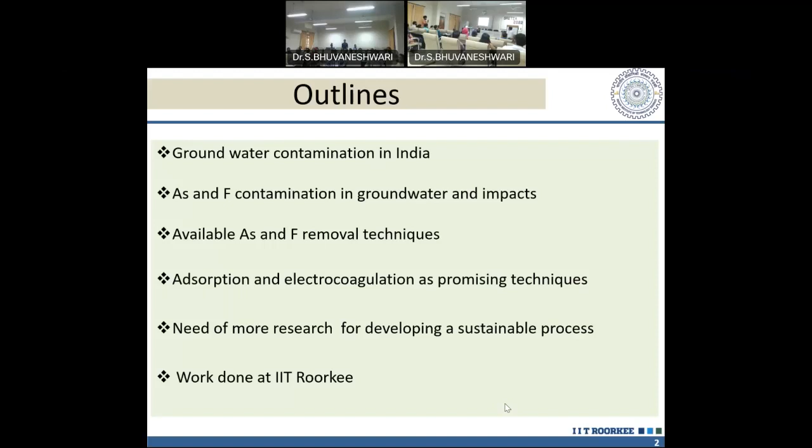So what is the groundwater contamination in India? If you see the Department of Science and Technology, Government of India site, you can search and you will see there are more than 250, 260 sites - water challenged sites in the country where either arsenic, fluoride, nitrate, cyanide, heavy metals are present in the water, or personal care chemicals, seawater intrusion, and salinity are there. These are the major challenge sites, and water is being affected.

So we got an opportunity to work on this area under the Indo-France water network project. We found that arsenic and fluoride are both available in the Rajnandgaon district of Chhattisgarh, and TDS is also a major problem in our area, would be there in Gujarat. So this can be the major problem of many other places not just reported. TDS is a major issue.

So we need to develop technology for this purpose, and we are focused here to do something for arsenic and fluoride contamination, and also personal care chemicals etc - the next class will discuss grey water treatment. That way we are targeting one by one as per our capacity: development of adsorption-based low cost systems for treating arsenic and fluoride contaminated groundwater, and development of electrocoagulation-based low cost systems for the same. These two areas we have identified as per our capacity and background.

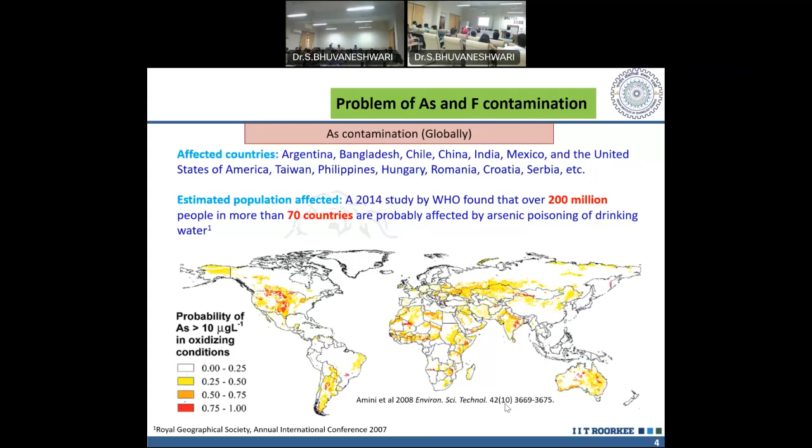In India, this is the full map, but arsenic contamination is mostly in West Bengal and Bangladesh, and other parts along the Gangetic belt. Mostly the Gangetic belt has the arsenic contamination, apart from some areas; it's not widely spread across the country. Some other areas also.

This is basically supposed to be due to the presence of stagnant flow water in the Ganga, and due to flood situations or other geological reasons, this is affected. But in other places where we are working, like Chhattisgarh, the reason is supposed to be different - maybe from industrial effluent, because there are mines, so mine drainage will be responsible. Whatever the reason, ultimately the groundwater is contaminated, and this is the statistic you see.

So it's a 2017 report - 239 million people, more than 21 states are probably affected by arsenic in drinking water.

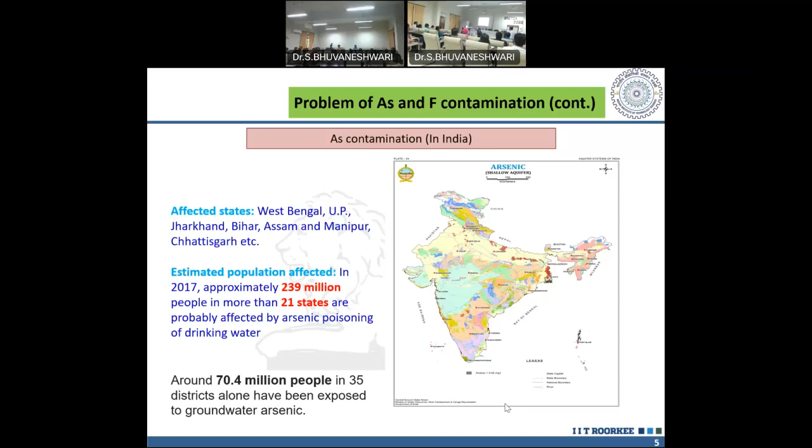And this is our Indian context again. As I told you, Rajasthan, Punjab, Haryana, Gujarat, Maharashtra, Chhattisgarh, then Bengal, Bihar, and also Assam are largely affected by this fluoride contamination. Estimates say the estimated population affected in 2017 is 11.5 million, and more than 19 states are probably affected by excessive fluoride. So these are the data.

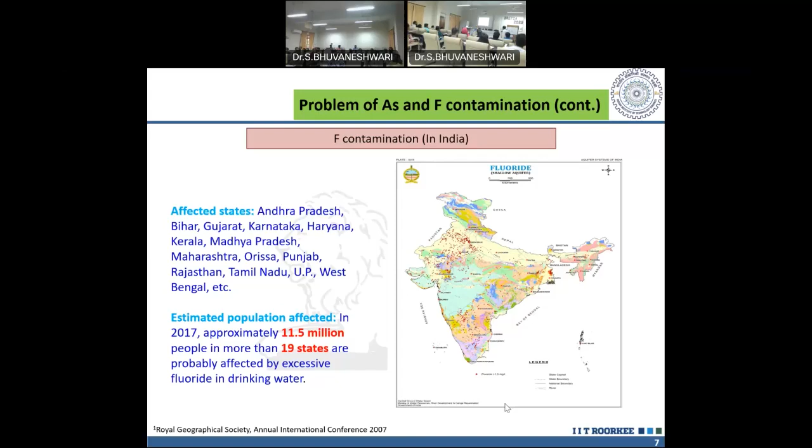Then you see both arsenic and fluoride are both available in the water - in Assam, Bihar, Chhattisgarh, Karnataka, Haryana, Jharkhand, Punjab region. We have identified some regions like this one - this is Chhattisgarh.

And the effects you know very well - because of arsenic content, cancer, arsenic-related cancers. And fluoride also gives different types of maladies. There is a problem of fluorosis, including skeletal fluorosis. So these are the negative impacts of arsenic and fluoride - these are very advanced impacts we can say.

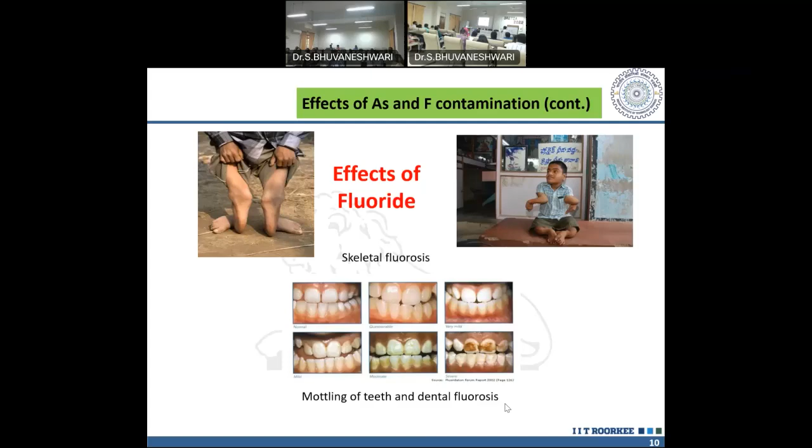Please go ahead. Give some time. Okay, now.

So what we have seen now is that arsenic and fluoride are available across the globe and in India mostly, so we need some treatment. As I mentioned, our people are not responding well to control by conventional methods.

Now, what can be the most suitable technique for us? For that we need to review all the available techniques - what are the positive points, what are the negative points, what is the scope of improvement. That we have to identify, so that is what we are going to do now.

The different techniques are precipitation and coagulation as one technique, another is membrane-based process, ion exchange and adsorption. These methods are recommended by EPA for arsenic removal - these are best available techniques. This is tutorial work, we do not need to repeat it. Now we have to compare which one has potential to remove arsenic and fluoride from the initial level available in India - that is the first part. And second part, where is the scope for further reduction?

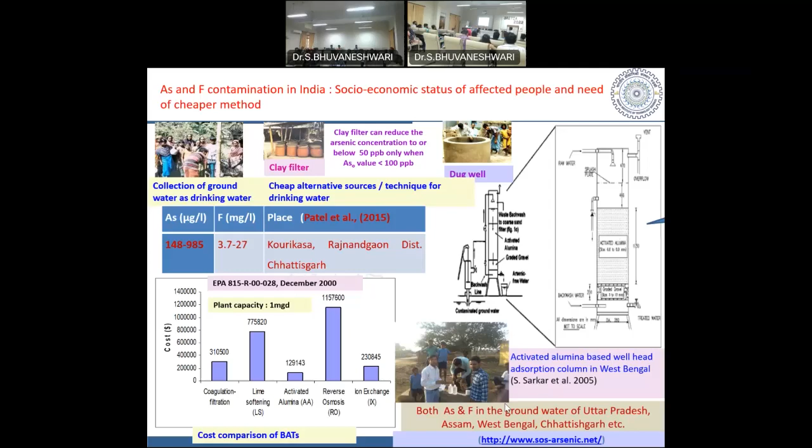Then you see that people have also tried. Prior to our effort, we will try to use this method, adsorption and coagulation method, as done differently by DPHE Bangladesh, public health engineering Bangladesh, and B.E. College.

B.E. College Howrah, so they have also developed some technology. Then there is Pal Trockner technology, and West Bengal public health department, they have also developed technology. Then RPM Marketing Private Limited, and engineers, they have developed technology. Jadavpur University also has developed technology for this, all for arsenic removal.

So all these removal technologies are based either on adsorption or coagulation, because these are the cheaper options we have already mentioned. Okay, then these are some salient features.

So what is this? Coagulation, sedimentation and filtration - this is the Bangladesh technology. This is the photograph showing how they coagulate and then separate. And here also you see an adsorption column fitted with tube well, adsorption on activated alumina, with capacity of 1.41 gram per kg, which is not very high.

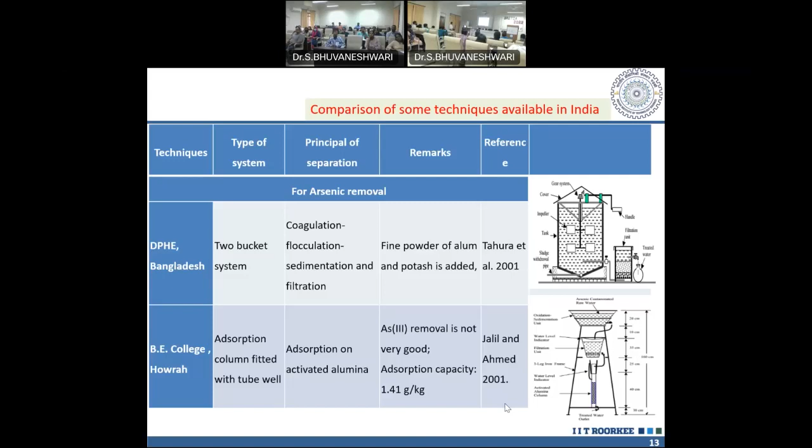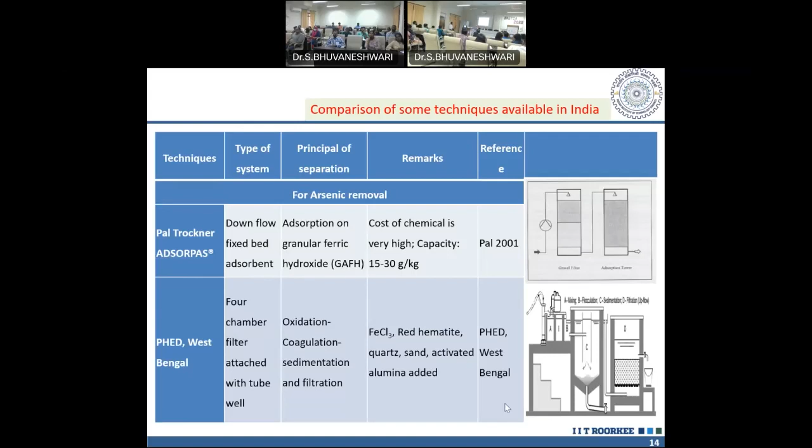Although there are some limitations, price is high, 2 rupees 31 paise per liter, for this two-chamber unit. The enhanced hybrid activated alumina adsorption they have used, with a fixed bed adsorber of ferric hydroxide.

Now we are coming to see the available technology for fluoride removal. The first one is the Nalgonda technique, developed by... this is based on coagulation and sedimentation.

Another is the Prasanthi technique, using activated alumina based, with AlCl3, alkali, aluminum salt, lime, and bleaching powder. There is a chance of overdose, so it has some limitations. Sulfate concentration in treated water is greater than 400 ppm, and aluminum concentration is greater than 0.2 ppm. These are some negative impacts and limitations, but the Prasanthi technique is still workable.

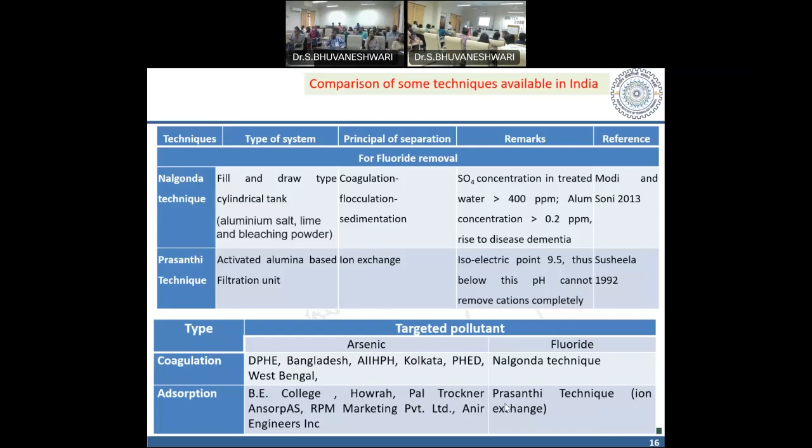What are the drawbacks? You see here, this 2017 report from the International Journal of Environmental Research and Public Health. If we see, 475 out of 570 Arsenic Removal Plants were not really useful, with 145 not even in working condition. Removal of arsenic by 264 ARPs showed arsenic reduction from 185-165 microgram per liter to 44-87 microgram per liter, which is above the permissible limit, not below it.

These are the limitations. 28% of these stations could not meet the guideline of 50 microgram per liter at that time; now it is 10 microgram per liter. So you see all the techniques being used are not that effective.

This was the driving force behind our effort to do something. So then we decided to develop new adsorbents and replace coagulation by electrocoagulation. If you can replace coagulation with electrocoagulation, we get two advantages. One is we do not need to add additional chemicals.

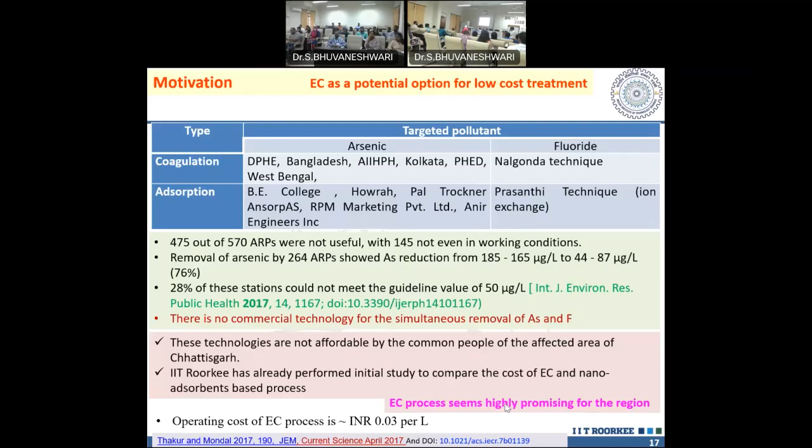Again, there was some confusion about whether we should put in the effort or not. Is there any success on this process? Because electrocoagulation is not a new concept, but its application at a wider scale is relatively new - handling a large volume of water, it is not that well established.

So we searched and tried to find out if there is any example. We found the Gadgil Lab, USA, at Berkeley, California - they have developed this and are implementing it in our country, in West Bengal. So American people are thinking about our solution and they are coming and setting up the plant for us.

Okay, you see, so this ECAR, electrochemical arsenic remediation, this method. What is happening?

Electrodes, cathode and anode, the electrode is iron based, so iron hydroxide is produced. Iron hydroxide helps oxidize arsenic 3 to arsenic 5, and arsenic 5 is settled down. That is the mechanism, so that way they are able to produce treated water.

This is estimated at 0.03 USD per person per day. So what is the cost now? Can you calculate? 0.03 USD per person per day, 0.03 is 20 how much? One person, how much can it be?

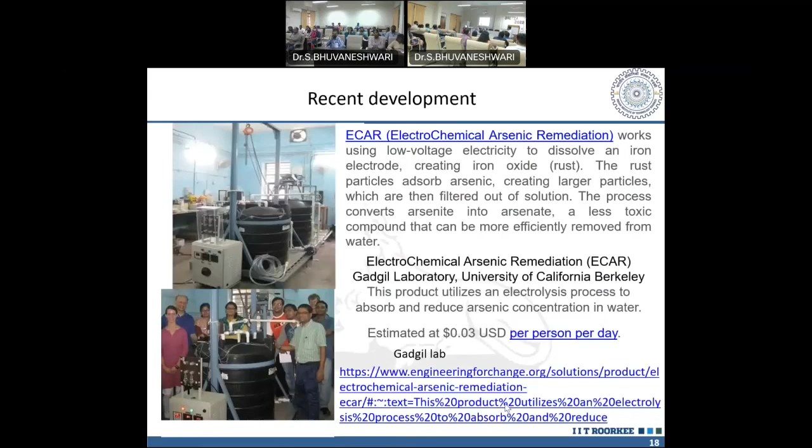Here another mechanism is used. In this case, this is Germany, the German people are working, and their plant is running in Haridwar, near our institute. The German people are working, they are installing a plant in our institute. So you see here, what is the mechanism?

Here, electrocoagulation means dissolution of the electrode is not taking place. The mechanism present is that electrons are released, then chloride and electron react with water, producing O2 and so on, and the chloride present in the water is converted to chlorine.

That chlorine reacts with H2O and gives HOCl. This HOCl helps the reactions: Fe2+ plus HOCl react, giving FeOOH plus Cl minus plus H plus. This H3AsO3 reacts with HOCl, and then forms H2AsO4 minus. This is the mechanism for removal.

So no, dissolution of the electrode is not necessary here. There will be some reaction and then separation, filtration unit. So we see that the filter has a depth of 66 centimeters and a diameter of 17.7 centimeters, accounting for a media volume of 16.3 liters. So this is their technology.

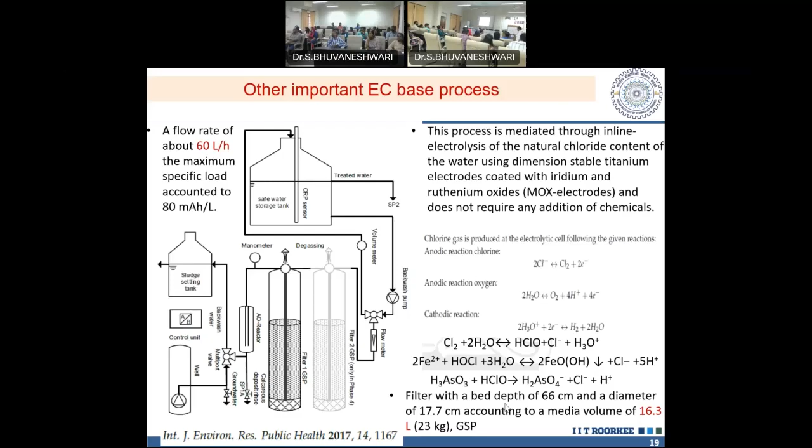Well, in our system we don't have other compounds, no, the organic purity is nil, there is no organic content in the water. So how would the organic reaction occur? Okay, that will not work then. Okay, then you see some other case. Any more questions?

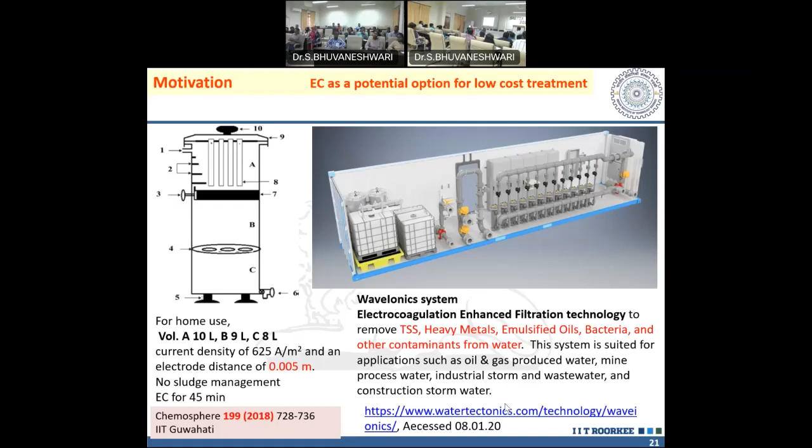This is the report of some EC-based technology used for wastewater treatment as per the literature. That's some inspiring material. So what we gather from this is that electrocoagulation has potential. This method has potential to be used in the treatment of contaminated groundwater to remove arsenic and fluoride.

Can you conclude from the discussion we have made? We can do that, but we have to modify and develop our own system for our own application, because we have never seen any system describing the working with wastewater having the concentration of arsenic and fluoride present in our country in the same way. We have not seen any example, so we have to do that now.

And spent adsorbent management and EC sludge management is an important issue. We have not seen any such report, because I am taking arsenic and fluoride from water to solid. Then what do we do with that solid? That is a great question.

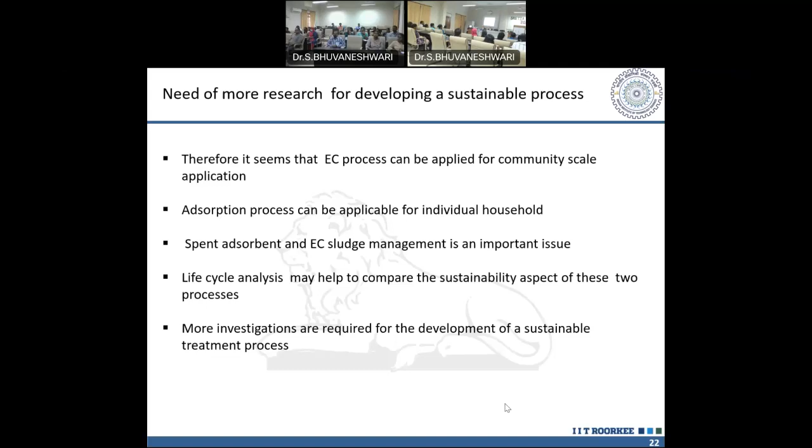Now, can you guess what type of knowledge we should have if we want to develop a new system for us on the basis of our background? We should know the working of the adsorbent, how an adsorbent works, what is the principle, what is the scope for development, and how we can monitor the adsorption capacity of the adsorbent. To know all these things, that is the first part.

We have already completed that part prior to this review, so let us have some discussion on that. That will help us to understand further. So what I have done, this is my PhD work, my own PhD work.

At that time, let's say 2004-06, arsenic removal was a great problem, and there was no technique in our country to separate arsenic 3 and arsenic 5, analyze them, and classify them. We also developed one technique for isolation for that.

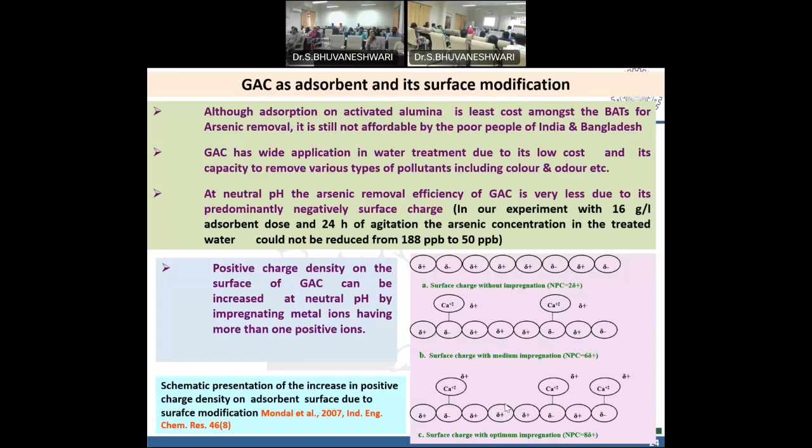And pH of the solution will play a role in deciding the surface charge of this adsorbent. pH ZPC is there - zero point charge - that is the pH at which the surface has zero charge. So that way we can guess and design the adsorbent, and there are three types of mechanism: physical, chemical, and ion exchange mechanism.

Ion exchange mechanism can also help for the capture of arsenic or any molecule. So we have to change our surface accordingly, keeping in mind the possible rules for the adsorption.

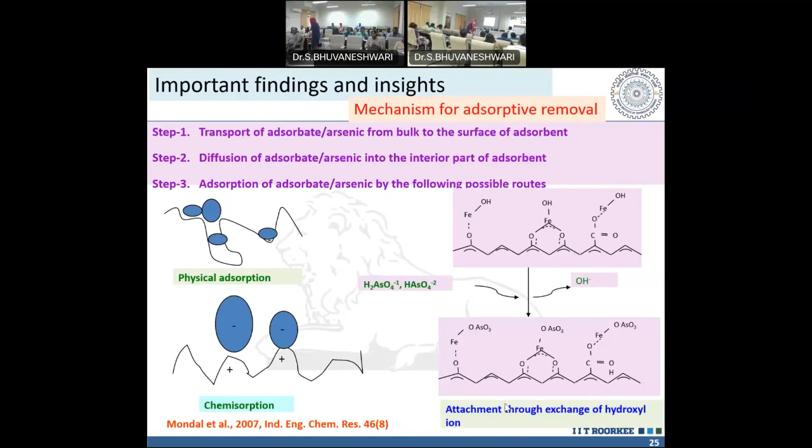Then different types of metals we can impregnate, thinking about the charge - copper, calcium, manganese, and iron. They have different characteristics, different removal capacities. I think iron will be having more capacity. So that way we started.

At that time we thought this adsorbent could be competitive, but now it is not competitive, because many people want to develop other alternatives. So that is a good challenge - to develop something new which will be very effective.

We spent our time but did not get success. That success went to others at that time - they developed other materials with more capacity. We felt no problem. Failure is the process of learning. So you see how it failed.

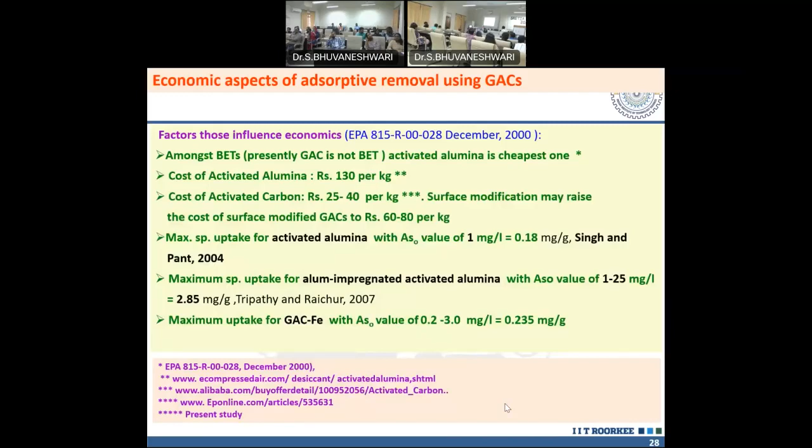Then we started with other materials - laterite soil based adsorbent, because this is a natural product so cost will be less, and aluminum hydroxide and nanoparticle based adsorbent. So this is aluminum that people are using, chemically synthesized aluminum. We tried to synthesize aluminum electrochemically instead. If we change the route, what will happen? Production cost reduces because a lot of purification steps are needed nowadays. That way cost is reduced and quality is also maintained.

So this is one advantage of AHNP. And this is ABTL, surface modification of ABTL, the acid base treated laterite soil, which we have produced. So these two approaches we found are still relevant today, competitive with other adsorbents available in the market.

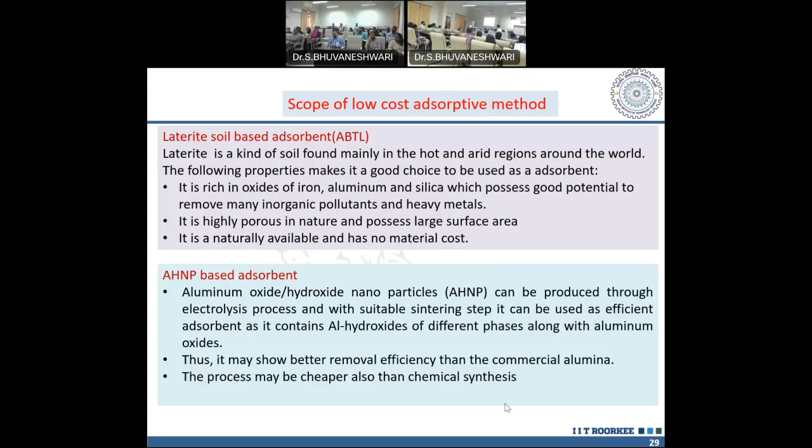So what was the step for ABTL? Leaching of iron and aluminum ions in acidic solutions. Our objective was to leach this into the solution. First, acid treatment has this role: Fe3O4 and Al2O3 available in the laterite come into solution as Fe3+ and Al3+ ions. Then with excess HCl, it is vaporized, distilled, and recovered.

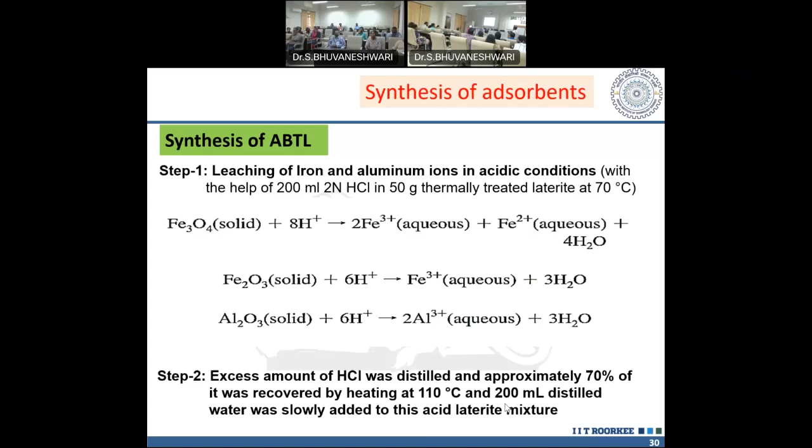The third step is to add alkali. When we add alkali, the iron and aluminum species available are converted to iron oxyhydroxide precipitate and aluminum oxyhydroxide precipitate on the surface of the laterite. After acid base treatment, we get this final product. By this way we see significant increase in the arsenic and fluoride removal capacity.

So this adsorbent has good both arsenic and fluoride removal capacity, and it has potential to become a commercial scale application.

So this is what adsorbent development looks like. We got two adsorbents, then we have to verify them. How do we do it? Now I am going to give you a clear concept of how to convert laboratory knowledge to field application.

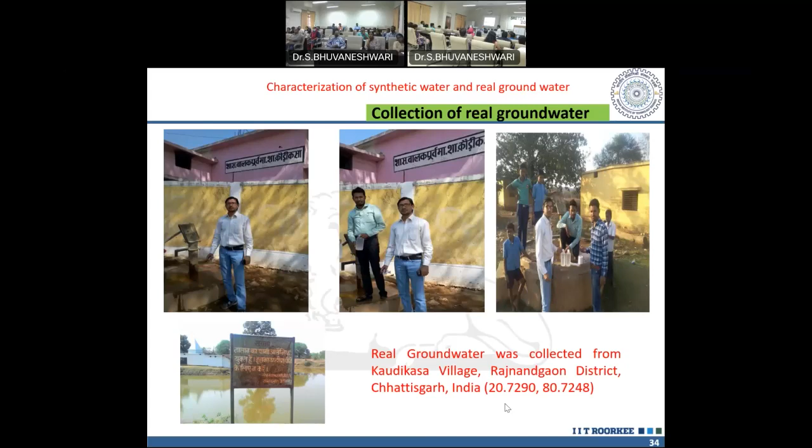So these are some laboratory parameters we have to simulate. We cannot take only arsenic and chloride; we have to consider all the parameters and try as much as possible to simulate real conditions.

Then performance of the experimental run: at first, while we do this, we need to get the adsorption capacity, otherwise we cannot design at all. We have to get the adsorption capacity, and that is done by batch scale study.

So this is the batch reactor study. Certain RPM, certain volume, certain adsorption dose, and certain time were given, and optimum conditions are found at pH 7: adsorption dose 20 gram per liter for ABTL, and 8 gram per liter for AHNP.

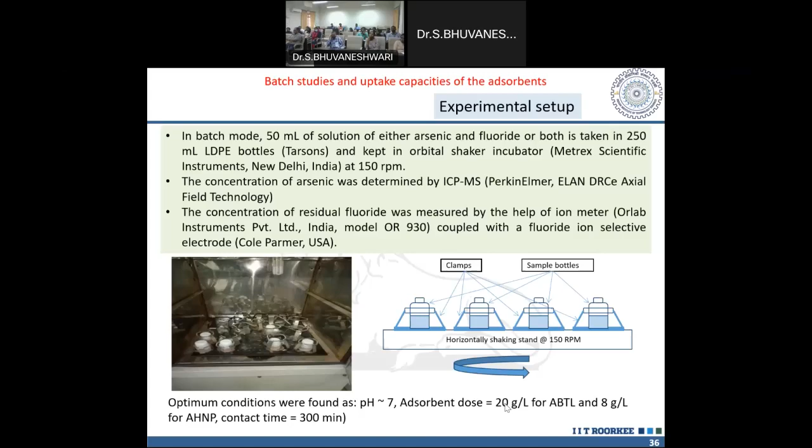20 gram per liter ABTL will never come to commercial scale. 8 gram per liter is also high, but since it is dealing with high concentration of fluoride, there may be possibility. But this is the higher range of adsorption dose. So from the initial study we can guess whether this has potential to come to the market or not, because of this.

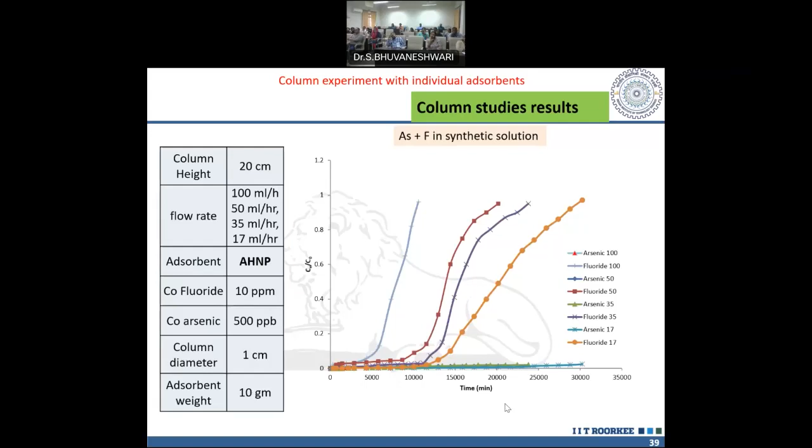Then this is the water treatment unit. Here we can put 5 liter water, it will pass through this. We maintained a certain residence time, then we get the treated water - encouraging results. So this system was patented again, and this technology was also recognized by the Confederation of Indian Industry last year, and IIT got the first position in innovation.

When you see the simulated groundwater treatment unit performance at AHNP ABTL, as already shown - in this case, column height 10 centimeter, 75 ml per hour, 35 ml; the 10 ml per hour option was omitted because we found it is not workable, this main one is workable. So this is the ratio - 16 gram to 4 gram, that is 4 is to 1, adsorbent ratio to make it cost effective. So this is the performance.

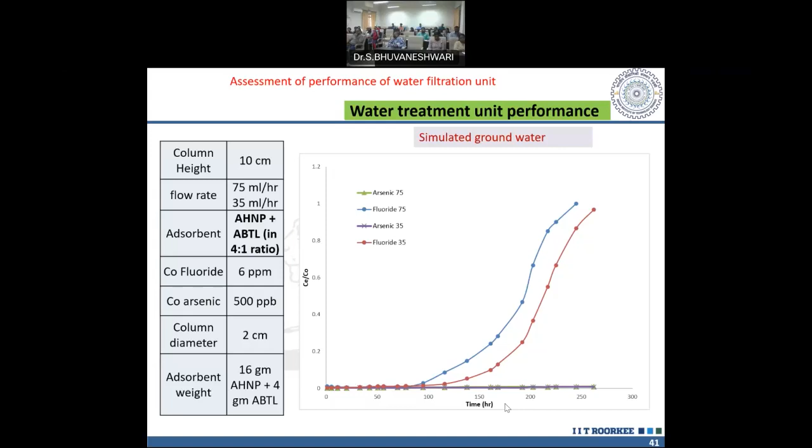These two are ABTL plus AHNP hybrid adsorbent, at 35 ml per hour and 75 ml per hour flow rates. This is our adsorbent amount, 16 gram plus 4 gram, and the liters of water used is 6.7 liter and 12.3 liter. This is the duration they are using, and if you scale to 1000, that is 615 liters. So 1 kg of adsorbent can give us 615 liters of treated water.

So that is the prediction we are making from the lab scale study. We can make such predictions, but then we have to validate it.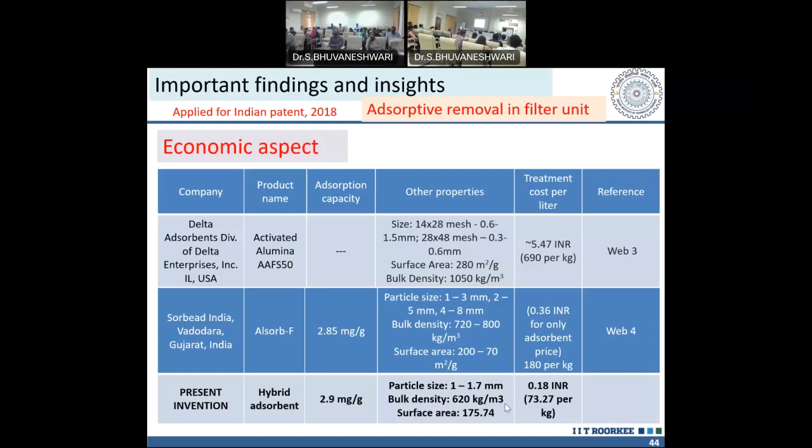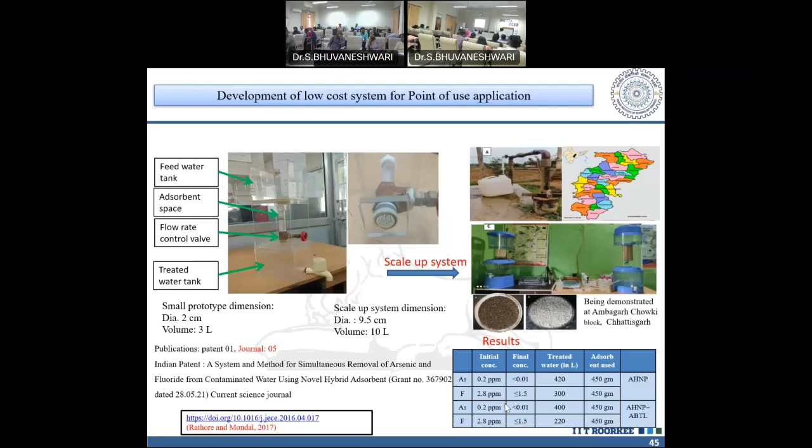This is the actual tested prototype.

Now we will see some working videos, it is self-explanatory.

So now it is clear to you how it is working.

Do we need to replace it or is it okay? If you need to replace, it can be done, or it is okay as is. So this is the adsorption and adsorbent system.

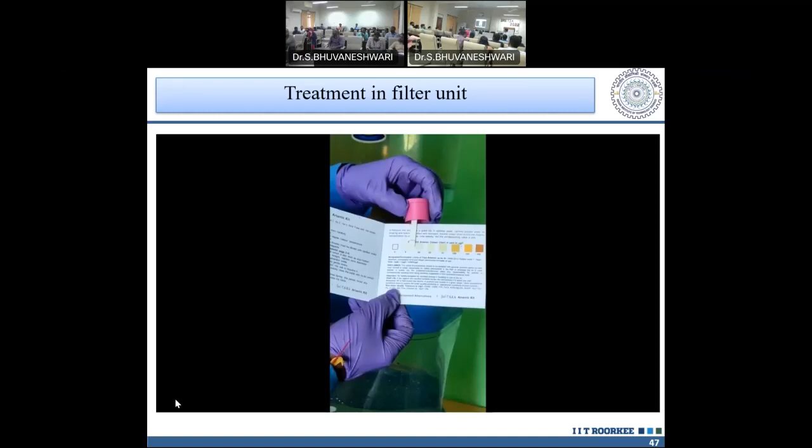We are already in the final stage. The product is ready with it.

We are talking about the household application, as I told you. Now for commercial scale, or sorry, community scale application - what unit will be there in a village, and through pipeline it will be supplied to the individual houses.

This is as per the plan of Government of India - we have to give pipeline to each household. So based on that concept, this system, this method at a population-based level will be more suitable.

So we started work on this system in 2017, even before that in 2015-16. Initially we started in a batch scale setup, and then moved to a continuous scale setup.

The electrocoagulation for arsenic level in continuous scale was first reported by our lab. This was published in JEM and was also recognized by Current Science journal, where it was published in this document.

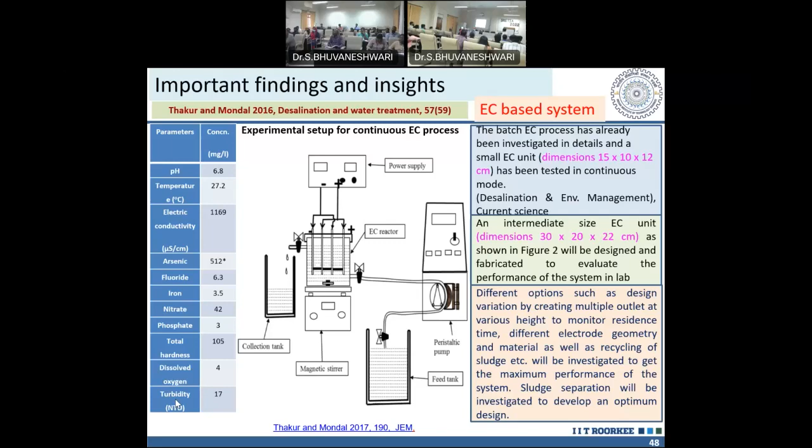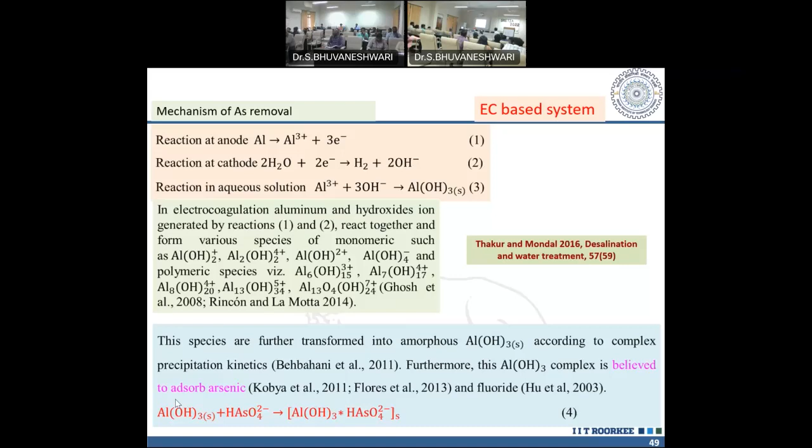And this is the removal mechanism for fluoride removal. Fluoride and arsenic are not removed through the same mechanism, because there are some variations. The mechanisms involve adjustments on aluminum hydroxide particles, co-precipitation, and fluoride attachment to electrodes. So these are the different methods through which fluoride removal can take place.

So these are the mechanisms for the removal of pollutants. Pollutants present in the wastewater can be removed by this coagulation. Coagulation and flocculation - is there any difference here, you can say?

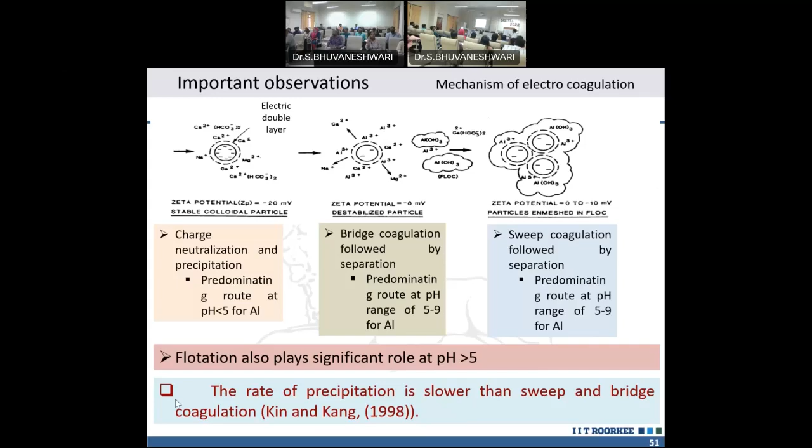You see, with respect to any other literature, this is quite comparable and it is better. In this range, few literature results are available. If you look in this range, you will not have gotten both arsenic and fluoride removal together. Except for this one. So that way, this was our unique study at that time.

And then these are the initial, the 10 into 15 into 12 centimeter reactor. So 1.8 volume and flow rate 1.4 liter per hour, 60 minute residence time, and power 30 volt and 0 to 10 amps. So here we are applying 10 amps and then we got this result for 1.8 liter.

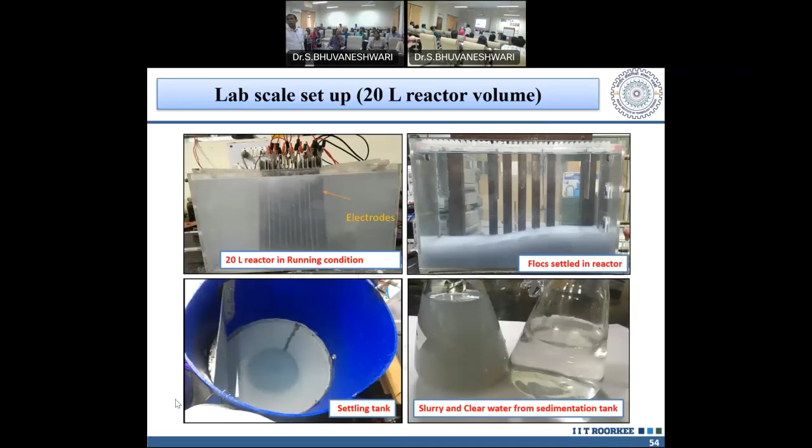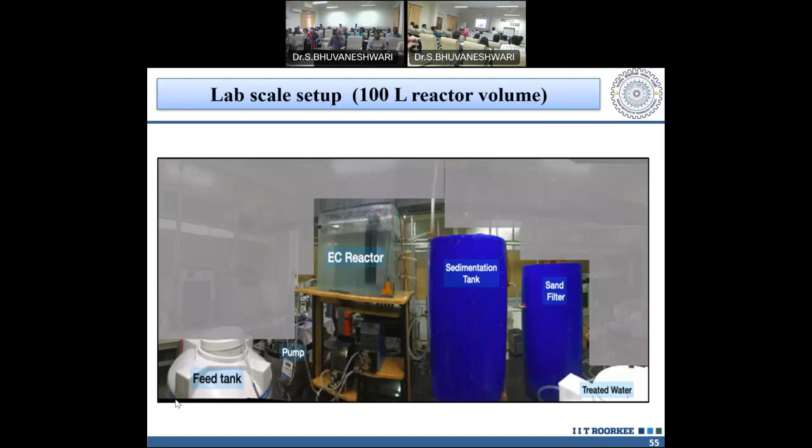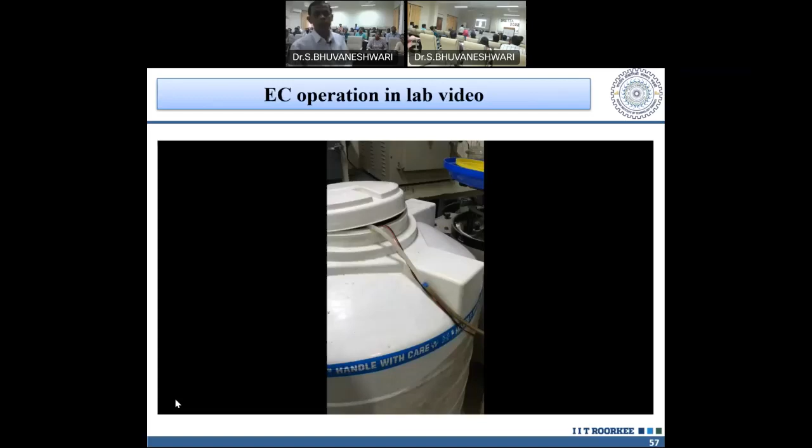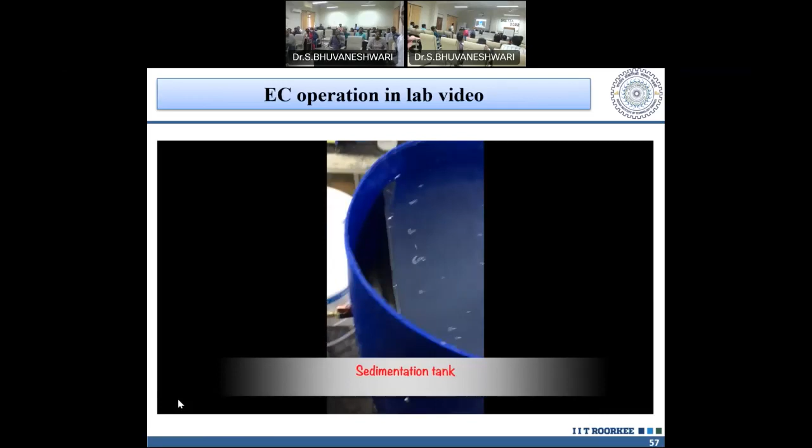Yes, synthetic water in lab. So then your 3D electrocoagulation process gives you different units here. So after treatment we need some other treatment also. So this is our filtered water, and now we are going to field.

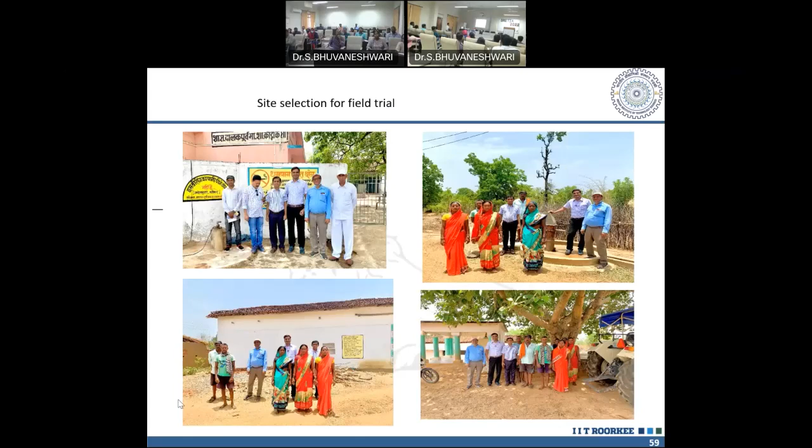So this is the real field we have identified. We have visited the place, and you see the economic condition of the people - very poor people are there. So we have to do something. Basically, in the field also we have tested the field level. This one.

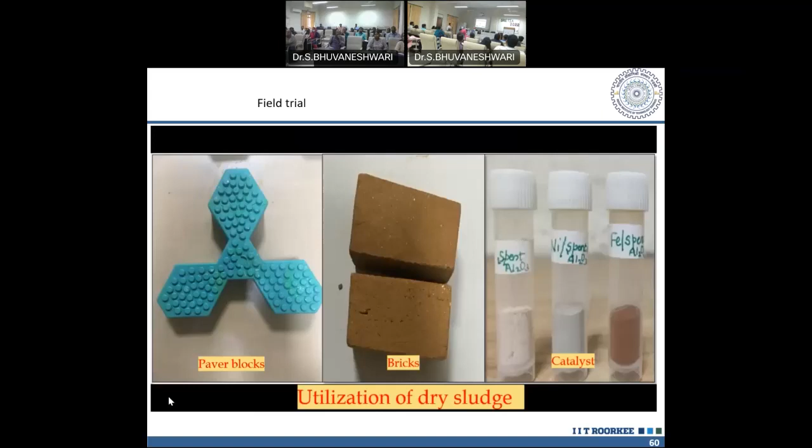Okay. This is a field level study already demonstrated, funded by DST on the water technology initiative. It was targeted to have say 1,000 liters per hour capacity, but we have got 2,000 liters per hour capacity, and even more than that. We have some limitation, but we can increase it more than that.

So we started initially, and to some extent we are able to achieve our goal. Now we have to commercialize it. We have to put more effort to convince people and to put the plant in the real site. The cost will be like 3 paisa per liter.

The cost will be less. Another question is the sludge management - that is a big issue actually. I am told the pollutants I am taking from water to solid, they are not very good. It deposited on the electrode. Deposited, yes. How long will it take to treat that?

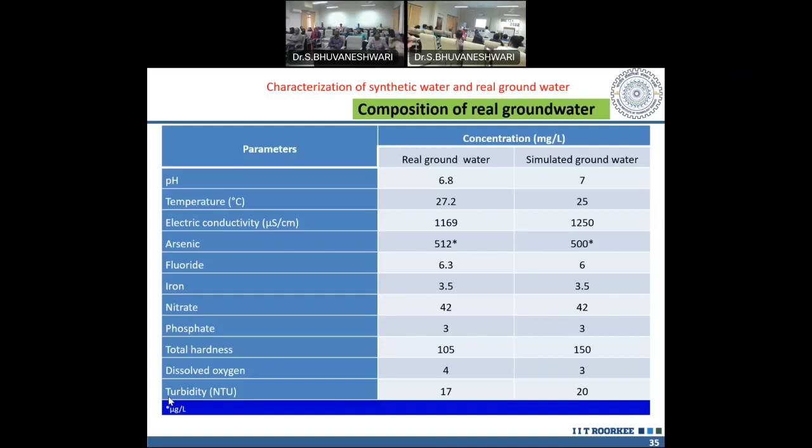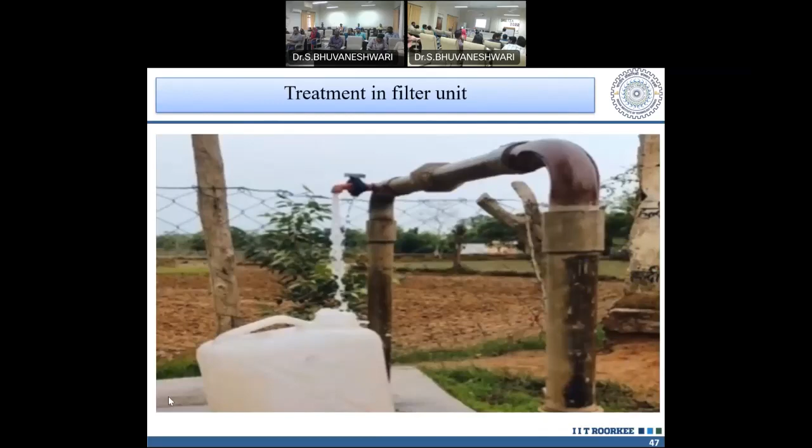So the material which is generated, one process is brick formation. In the lab, the alumina agent we got was white color, but in the field we got black color. Same material, but in the lab it is white, while in the field it became another color.

Because of the presence of other components, which we were not able to identify at that time. There are some other materials involved. So this is one route, your brick formation.

If we use this in the brick, certainly the quality may be deteriorated, or it may be improved also. But in this case, quality is not improved, but also not affected much. Up to a certain percentage, we can use this material with brick material for brick formation. The margin is up to 20% of this bulk we can use, so that its quality will be as per Indian standard. The quality will not be of lower grade.

That will be great. But still, there is good scope for you to use these materials, around 20%. Then the question is coming, what are you doing then? What are the properties of this? You see your compressive strength will be there, and then the leaching properties - whether the arsenic or fluoride captured by the material will be leached once again from this or not - that will help you ensure it.

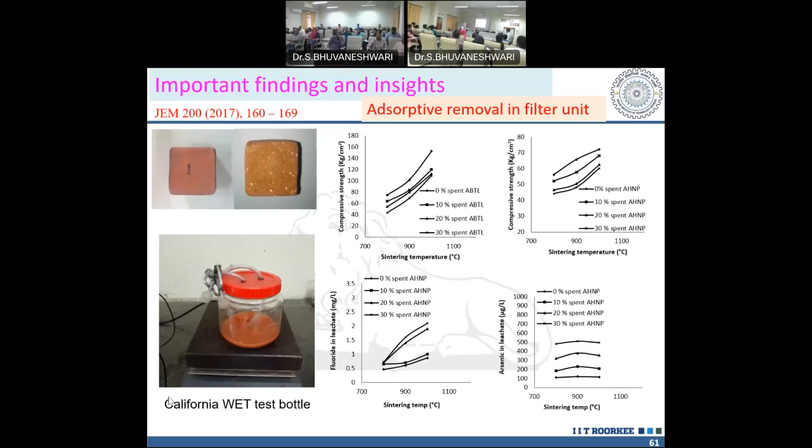Another route is catalyst formation. We can use this material as the base for the catalyst. So we have made some catalyst from this material, and we have used it for the pyrolysis of biomass. We are also investigating the pyrolysis of plastics, waste plastics. We have seen that particularly phenolic compound enrichment is taking place in the product. So while this is produced, we are getting a higher concentration of phenols when using this catalyst derived from this material.

Another sample we can use here is for paver block and tile production. We have developed another technology for the production of paver blocks and tiles from waste milk packets. With waste milk packets, adding this material to some extent, not completely - if you use it completely, the material will be vaporized and it will crack, so we will not get a product. But to a certain extent, like 10%, with other additives we can use it to make paver blocks and tiles, etc. So 2-3 routes are there through which these materials can be investigated, reused, and validated.

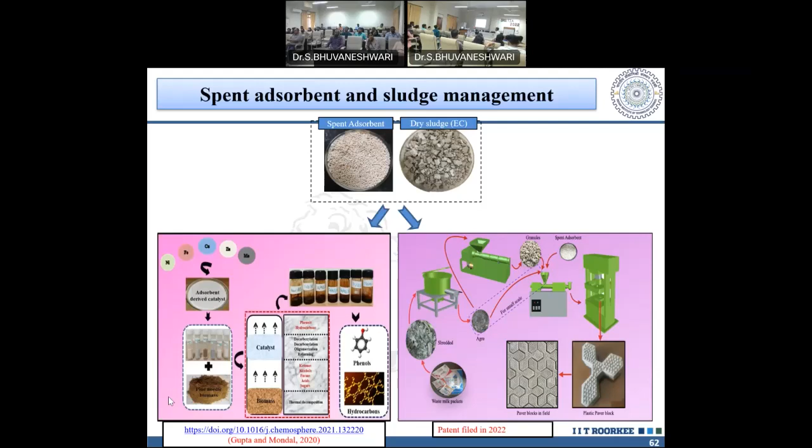Okay, so now I am taking some advantage to show you this slide. This is on the basis of these investigations of those plastics. We have started one startup, Glass Green Tech Private Limited, and this is our product, made from plastics, with these advantages. This material is demonstrated in IDOT, and it is around 1 year it is being, and the product is remaining as such, the quality is not affected.

So far I have shown you some lab to commercial, semi-commercial scale transformation. Now what topic is sustainability. This is fine, but our process has to be sustainable. So that part is remaining, we have to discuss that.

Sustainability, in this case particularly, we are talking about life cycle analysis. Sustainability is bigger than life cycle analysis, that we will not talk about. We'll be talking about the life cycle analysis.

Some investigation we have done here with this initial material which we have developed as ABTL, acid base or acid treated or stable thermal treated laterite - thermally treated, acid treated, acid base treated. So these three cases, then which one is more suitable, environmental friendly, which one is? So that was investigated.

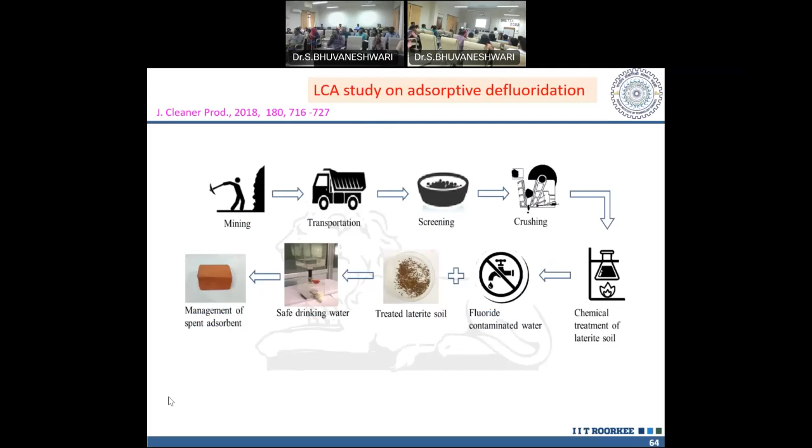Then for life cycle study, our objective is to fix a goal. So our goal here is to know the impact of these three adsorbents for the treatment. So particularly, then we need to fix one, we need to do inventory analysis. For inventory analysis, we need some system boundary - so what is our boundary for our investigation?

So here: collection of raw laterite, then size reduction, then transportation, then washing, then acid treatment, then heating at a given centigrade. This is acid treatment, then distillation of excess acid, then heating, and then defluoridation water treatment, then sintering of bricks. So then the material is going for brick formation, and this water is waiting for use.

For this sintering purpose, we are using electricity from biogas. Here for acid treatment, we are providing electricity from the grid, and surface modification of raw adsorbent is used - for this case, we are using electricity from the grid. This is for acid treatment, this is for acid base treatment: acid treatment, then again base treatment. This step is added - again washing, again drying, again defluoridation, and then sintering.

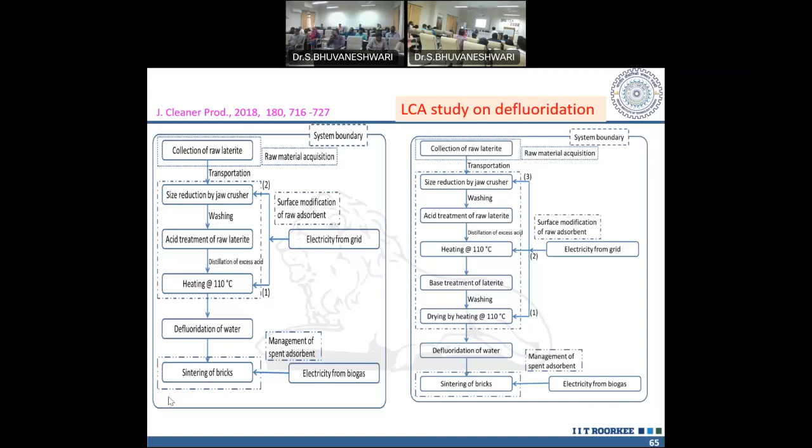For inventory analysis, we need a basis - that is 720 liter water treatment is the basis. So we want to produce 720 liter treated water. So for that, how much adsorbent will be required for three cases, and for the production of that much adsorbent, what will be the raw material requirement? So that inventory analysis is done.

And on the basis of that, your environmental impact analysis is done. The environmental impact analysis is done by using some software. We normally use CML method, one method, and ReCiPe method - these two methods are used for the analysis purpose.

And here you see the CML 2001 ABTL - so we have different parameters, these parameters are index of the LCA. What are those? Acidification potential, global warming potential, eutrophication potential, ozone depletion potential, abiotic depletion potential, abiotic depletion potential fossil, elements, fresh water aquatic ecotoxicity potential, human toxicity potential, marine aquatic ecotoxicity potential, terrestrial ecotoxicity potential. These are the different indices which have been included in the LCA analysis, and different softwares you can use.

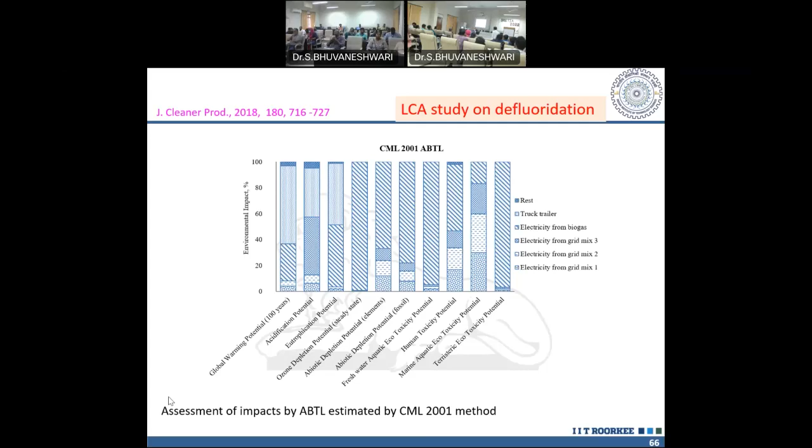Then different scenarios. Scenario 1 is truck trailer having 5 ton carrying capacity and distance 5 km, mining to process site. Scenario 2: truck trailer having 5 ton carrying capacity and distance of 10 km. Another is truck trailer having 12.4 ton capacity and distance 5 km. Fourth is truck trailer having 12.4 ton capacity and distance 10 km. Fifth is truck trailer having 17.3 ton carrying capacity and distance 5 km, and truck trailer having 17.3 ton carrying capacity and distance 10 km. So these are different scenarios.

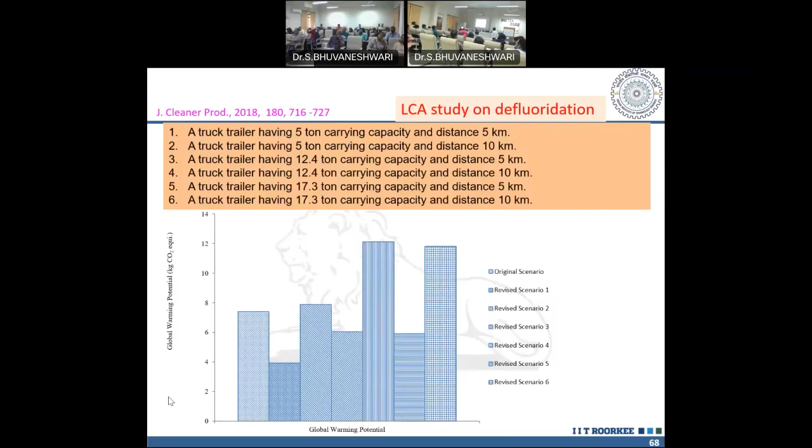Now we will compare. This is our earlier study, but now we have to compare between adsorption and electrocoagulation method when doing the same process - activated aluminum generated from the electrochemical process. One is absorbed, then sintered, then used for adsorption of arsenic and fluoride; another is in-situ arsenic and fluoride capture taking place, then we convert into the material. So the pathway is mining, then transportation, then processing in industry, and then we get aluminum plates - this is aluminum ore, this is aluminum plate.

Then we go for electrolysis, then drying, then calcination and adsorbent is formed. Then treatment, clean water, spent adsorbent, brick formation. The other process is different - the first part is same, after aluminum we get the same, but this part is not there. We directly get removal of fluoride and arsenic, then the sludge, and we get clean water. The sludge goes for filtration, drying, and then we get the product. So this part is different.

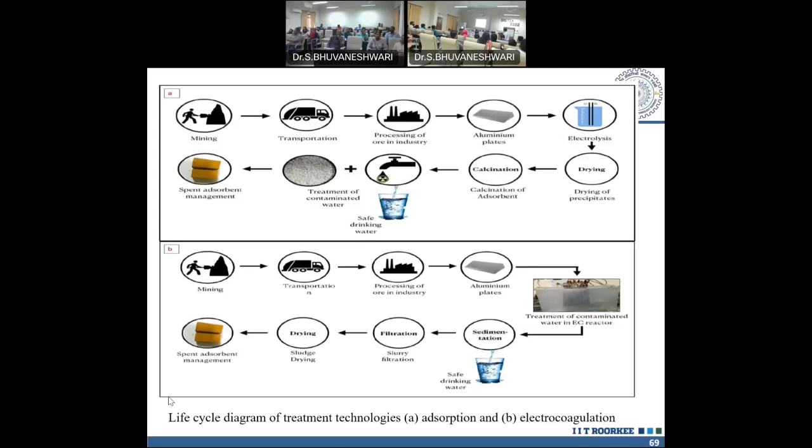And because of the variation in this part, the environmental impact changes drastically, and I will show you. So what is our objective here? 720 liter water treatment - we have to treat 720 liters of water for all the cases. Then how much material will be used, how much energy will be used - that inventory analysis we will do.

So in this case, what is this - aluminum sheet we are using. Then the electrolysis process, and then adsorbent will be formed, then drying of wet adsorbent and calcination, then wastewater treatment, then brick formation with the spent and treated water - we get 720 liters. So in this case, depending upon the specific uptake of the adsorbent which is produced from this aluminum, we have to fix the aluminum requirement - huge mass we need to have with respect to this one.

Here we are following the same process, but we are getting the removal without calcination. Directly we are getting the drying of sludge, and sludge is used for brick manufacturing. So here, same volume of water we want to treat, but two different processes require different material and energy, and so we get different impacts.

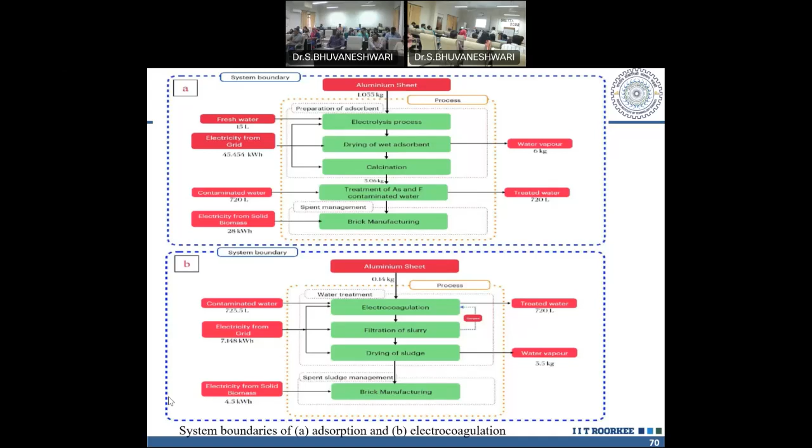How will we do this? We need the help of software, and before that we have to give inputs to the software. What is my inventory analysis? What are the different materials we are using for different cases, and what energy are we using for different cases? So that we have to do here.

Drying of wet adsorbent at 8-9 kg also requires some electricity, water vapor will form, and dry adsorbent we get, from 8-9 kg down to 3.06 kg. After that calcination, again electricity is required, and we get 2.75 kg from 3.06 kg.

Spent adsorbent management we have to do, and brick manufacturing uses this spent adsorbent. Here also we need clay, we need electricity, we need water. So 20% of brick weight, this water remains. So these are the different materials, inventory analysis, material requirement and electricity requirement.

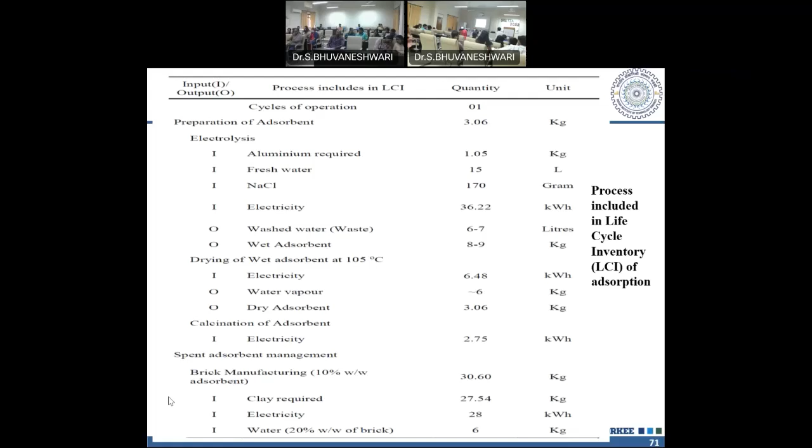So these are the inventory analysis for two different processes, and to solve it, we need to assume something. Some cases, some data are not available. We need to assume something.

For what some assumptions are there - the environmental impacts of manufacturing aluminum plates have been directly taken from the database, which includes the impacts of mining, collecting, and transportation of oxide, and the drying of wet adsorbent and sludge has been performed in a hot air oven with the capacity to dry 50 kg of wet material at once.

We are going to handle larger volume of material, but our lab does not have that capacity. So we have to take some assumptions which will be near to reality. So what data we are getting in reality, that we will handle to some extent. But we have tried available ways to give assumptions so that it will be near to reality.

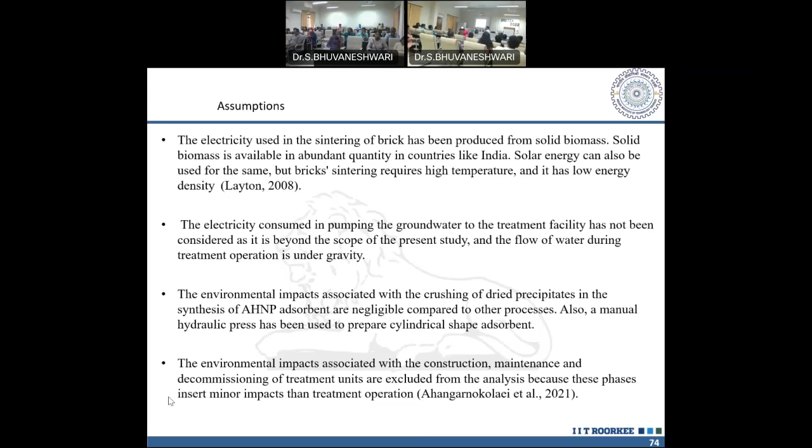The environmental impacts associated with the crushing of dried precipitates in the synthesis of AHNP adsorbent are negligible compared to other processes. Also, a manual hydraulic press has been used to make the cylindrical shape adsorbent. We do not have any machine and we cannot get that data, so manual data has been done. It's good, but we have to mention it because otherwise our result will not match with reality. It will be plain. Okay, then impact analysis.

For impact analysis, two methods are basically used: CML 2001 and TRACI. CML 2001 is developed by the Institute of Environmental Sciences at Leiden University, and TRACI is developed by US EPA. So there's a European database and a US database. An Indian database is not there, but SimaPro is under development. SimaPro is another software that is also used for this analysis of Indian database.

So CML and TRACI are different methods. The CML method has 11 different impact categories, or index categories, while the TRACI method includes 5 similar impact categories but with different indicators. Both CML and TRACI follow midpoint oriented approaches that characterize the impact categories directly caused by the immediate pollution - what immediate pollution will give impact to human health. These intermediate, midpoint categories are considered. For example, the CML 2001 method represents human health as human toxicity potential.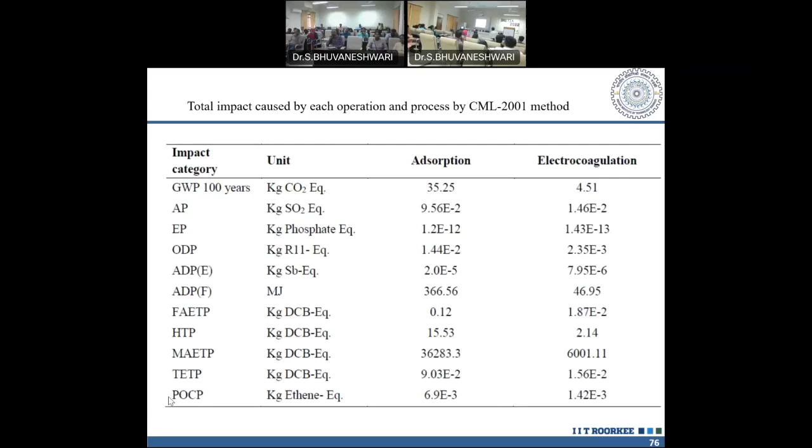The total impact caused by each operation and process is shown, adsorption and the electrocoagulation data is given - these data are also shown in the figure. So aluminum plate formation, electrocoagulation, drying of the coagulated material, electricity used in calcination, and brick formation - these are the different major sources where the pollution is coming from: aluminum plate formation, electrocoagulation, drying of the material, and calcination of the material.

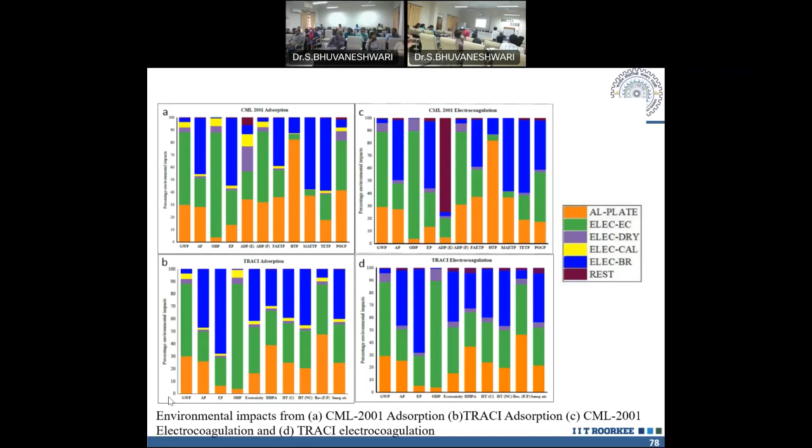The blue one, that is brick formation, plays a major role, then aluminum plate formation, and then electrocoagulation. Others are less significant, but in some categories others also play a major role. So depending upon the nature of the indicators, the contribution of different activities also varies. This is for the CML method, and this is the TRACI method, showing different indicators for the adsorbent, and this is a comparison of impacts using CML and TRACI methods.

This is for electrocoagulation. So the aluminum dissolution required for adsorption and electrocoagulation process is 1450 and 194 mg per liter respectively. As a result, if you compare these two methods, the adsorption method has a very high impact for all categories with respect to EC. So we can say, based on this data, that the EC process is much more environmentally friendly than the adsorbent process considered in this case - that is the HNP based adsorbent versus alumina electrocoagulation.

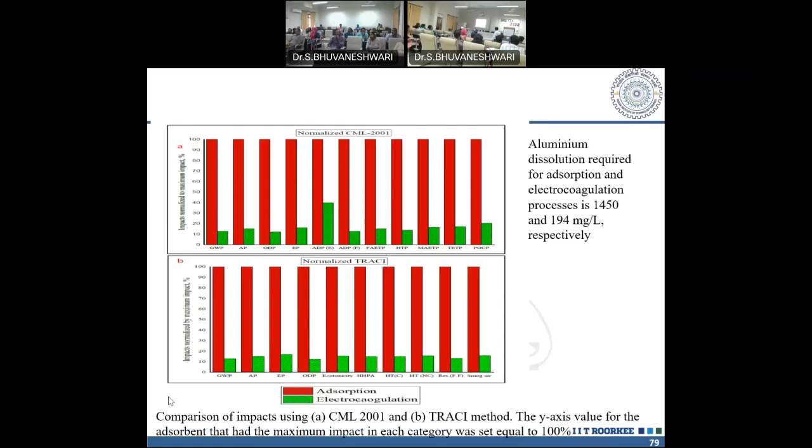So we have reached the end of the discussion. Now we understand that the electrocoagulation process which we are proposing has a good environmental impact with respect to the adsorbent process. It has potential to be applied at commercial scale, and it has the potential to fulfill the dream of the country. So it has potential - now we have to use it to convince people and to set up plants.